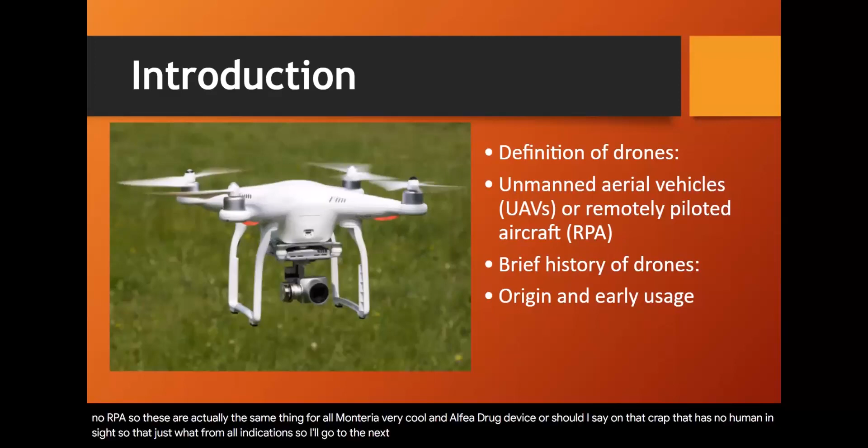So some people said yes for UAV and no for RPA. These are actually the same thing. UAV is unmanned aerial vehicle, and RPA is more like remotely piloted aircraft. A drone is just a typical aircraft that has no human inside. So let's go to the next slide to proceed.

In the next slide, we have what are drones? Drones are also known as unmanned aerial vehicle or remotely piloted aircraft. These aircraft can operate without a human pilot on board. They are controlled either remotely by human operators or autonomously with onboard computers. So you could have these drones being flown just by itself, or you could control them with your remote control.

But today we have what they call swarm drones, and this is where the technology has advanced to where you have multiple drones flying with very high precision and coordinated together to make a particular artwork.

The next thing is the concept of drones, where this concept actually started as far back as the 20th century, and for some reasons it's been used for a very long time. You can see it was emphasized that it was used in World War I and World War II. However...

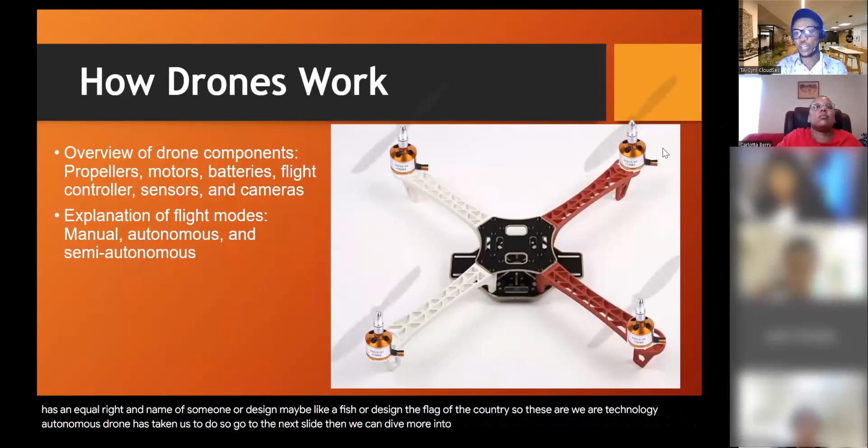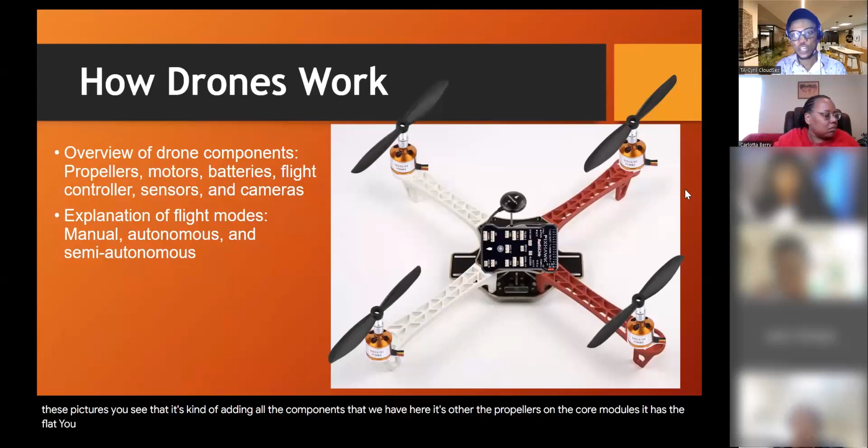So if you look at these pictures, it's adding all the components we have here: the propellers on the four motors, the flight controllers, and the GPS. When you click again, it's going to add the battery. Now you can see the battery underneath.

All right, more emphasis on how a drone works. Drones are equipped with multiple components, like I said earlier: propellers, motors, batteries, flight controllers, sensors, and cameras.

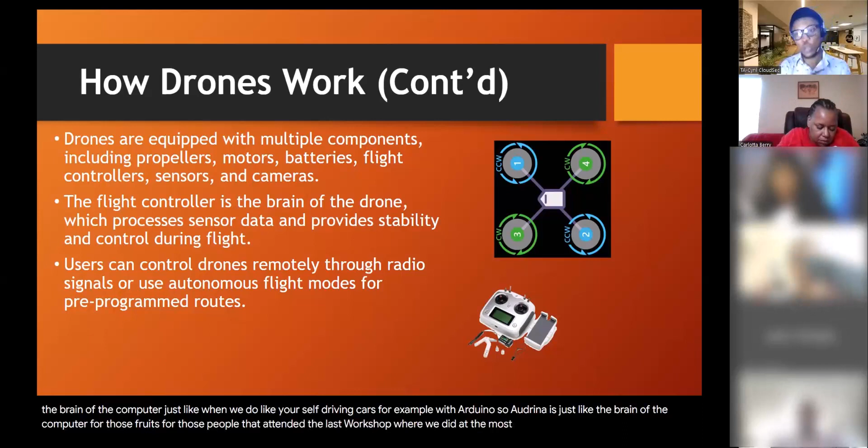The flight controller is more like the brain of the computer, just like with self-driving cars using Arduino. Arduino is the brain of the computer for those who attended the last workshop where we did the autonomous obstacle avoidance vehicle. But in this case, our Arduino in this technology is going to be our flight controller. So we have the KK2, the Pixhawk flight controller, and the ArduCopter, which is a flight controller for drones.

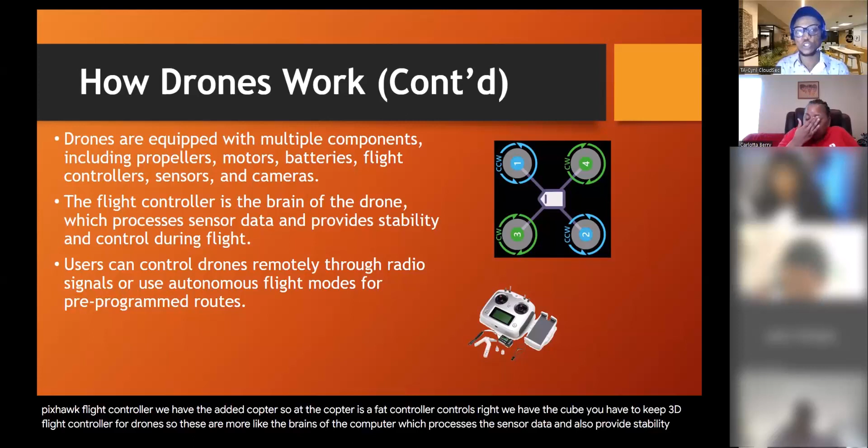We have the Cube, the Cube 3D flight controller for drones. These are more like the brains of the computer, which process the sensor data and also provide stability and control during flights. So users can control drones remotely through radio signal or, autonomously.

When I mean radio signal, what I mean is the control like this. I have this control, that's the joystick. You can actually use this radio, they call it radio, or you can call it remote control.

These radio signals can be used to fly this drone manually. However, you could actually still program your drones, more like a standard drone, not the one you have with you. You can program it with your computer and make them autonomous to fly with a pre-programmed route.

So when you see the picture we have here, you notice that we have four propellers, or four motors. When you look at it diagonally, you notice that two of the drones move counterclockwise, then the other two, 3 and 4, move clockwise. We'll explain this more in the next slide.

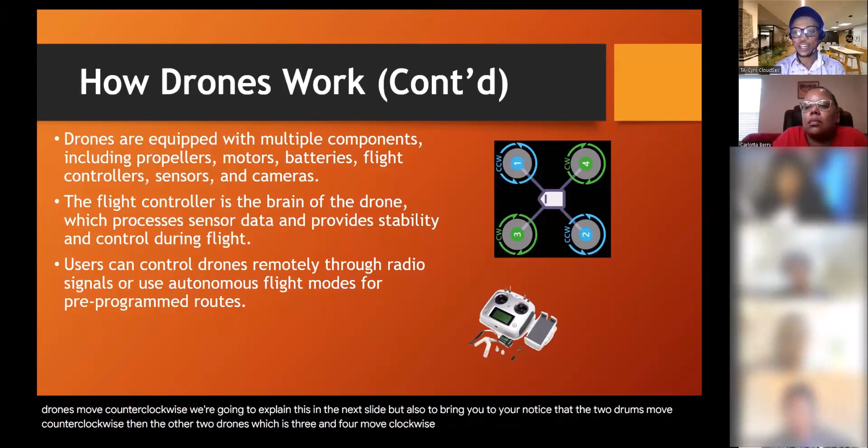Now, the reason this technology exists is just to make your drone balance while it flies, because it balances with these two directions, then balances with these two directions. So it doesn't make your drone turn around. It makes it stay steady and fly up and down.

Lastly, the picture we have there is just the remote control and the phone stand where you get to see your videos while you're flying your drones. That's just a picture of a typical drone remote controller.

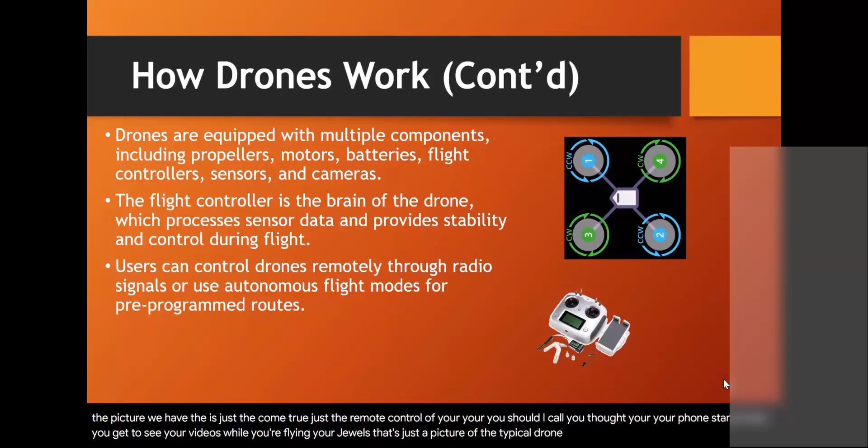I'm going to go to the next slide so we can proceed with the introduction of the DEERC D70 mini drone. This was a drone that was sent to us, and I think it's more like this one I have here.

This one has a 720p camera. These drones are toy drones, so don't really think you have a very, very big machine in front of you. I don't think you could expect much from these drones because they are quite cheap, unlike the more expensive drones. So these are quite cheap drones that you shouldn't expect so many big things from.

And it has a battery. I have my battery at the back here, so this is my battery. I don't know if you can see this, but let me see if you could see it. This is what my battery is.

Then one key start. You could actually press the button to start off, and you could fly in headless mode, which means you could fly irrespective of the position of the drone. So this is the front of my drone, for example.

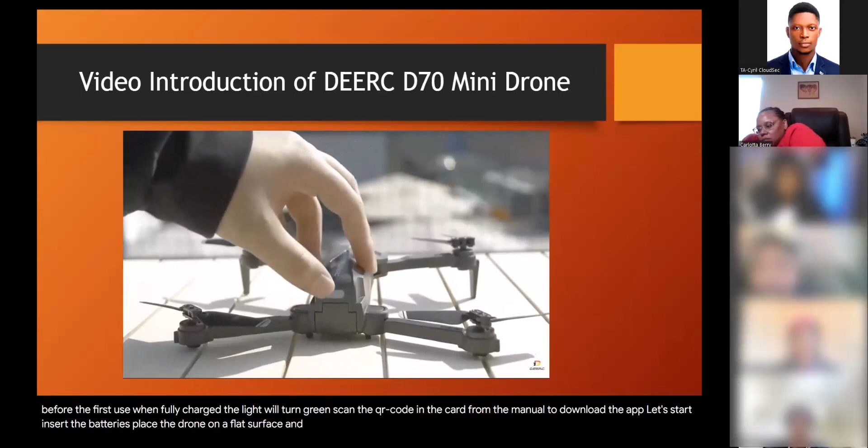Quick start. Insert the batteries. Place the drone on a flat surface and power it on. With the tail facing towards you, power on the remote control, and the drone will automatically pair with the transmitter. Connect to the Wi-Fi and open the app. Install the phone holder.

Unlock the drone. Short press to take off by pressing the right joystick once.

Push the joystick to make the drone flip in your desired direction. Short press to switch between the 3 speed modes.

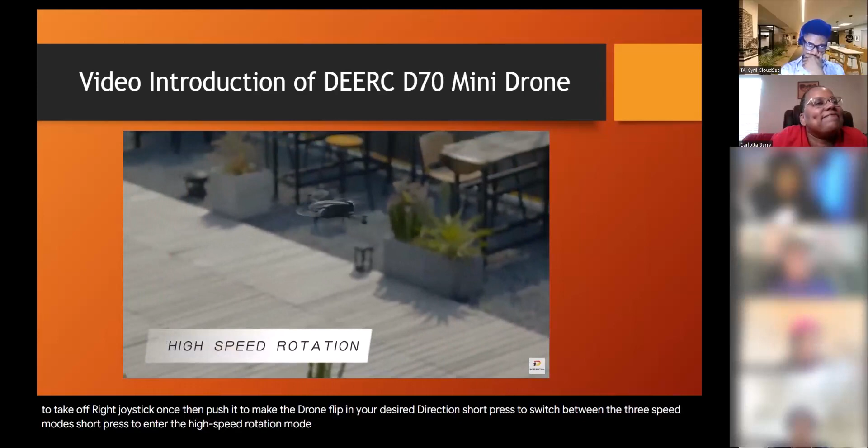Short press to enter the high-speed rotation mode. Long press to enter the circle fly mode.

Short press the left joystick to enter the headless mode, and the drone will fly forward in the direction of the head when you took off.

You can manually adjust the angle of the camera.

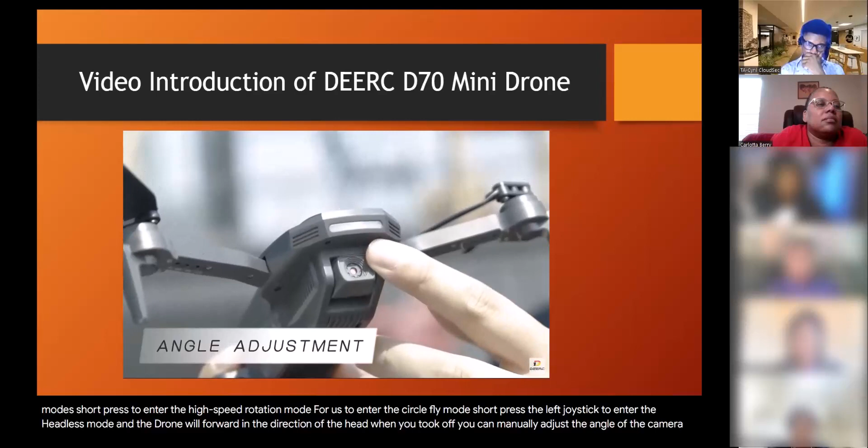Short press to take a photo. Long press to record a video, and press again to stop recording. You can hold the button in the upper left corner and push the right joystick in the opposite direction to adjust.

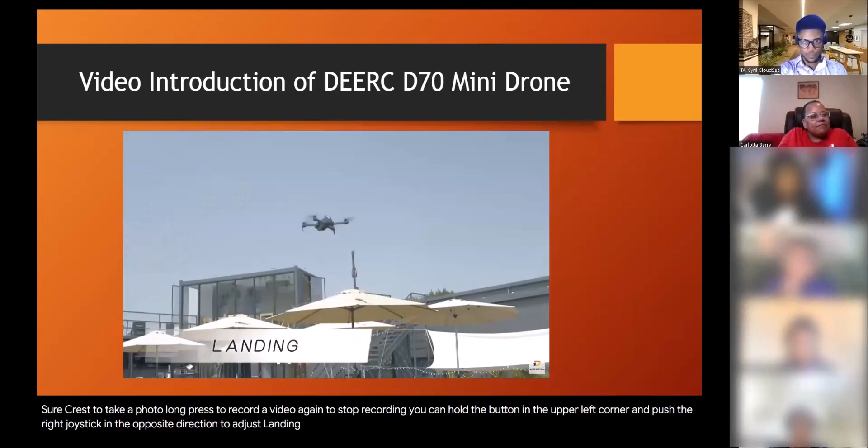Press both buttons above to emergency stop. Please use with caution in the surrounding environment. Controlling the drone without a transmitter.

You can view the tutorial, instructions, and album in the app. Enter the operation interface and call out the joystick to control it.

After activating the voice mode, you can control the drone's movements with specific voice commands like fly, right, and left. In tap fly mode, you can draw the flight trajectory and the drone will execute the command.

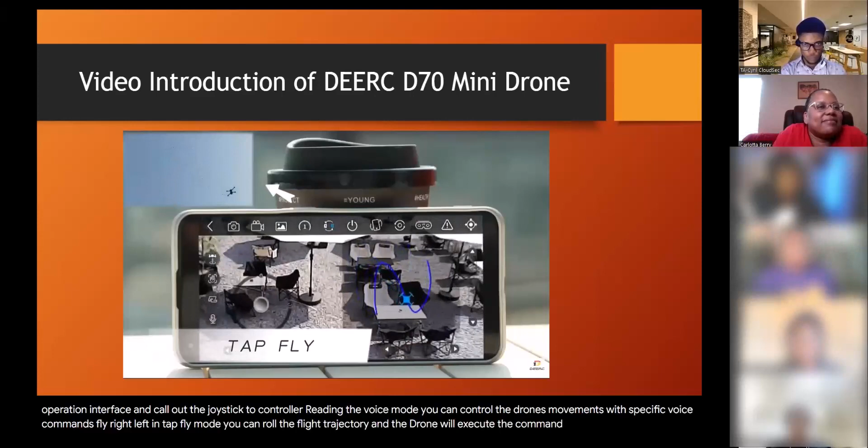Take a victory gesture to take a photo, and use a palm gesture to start recording, and again to stop.

You can also take photos and videos in the app.

Before turning on the gravity sensor, please hold the phone horizontally. The drone will fly according to the tilt of the phone.

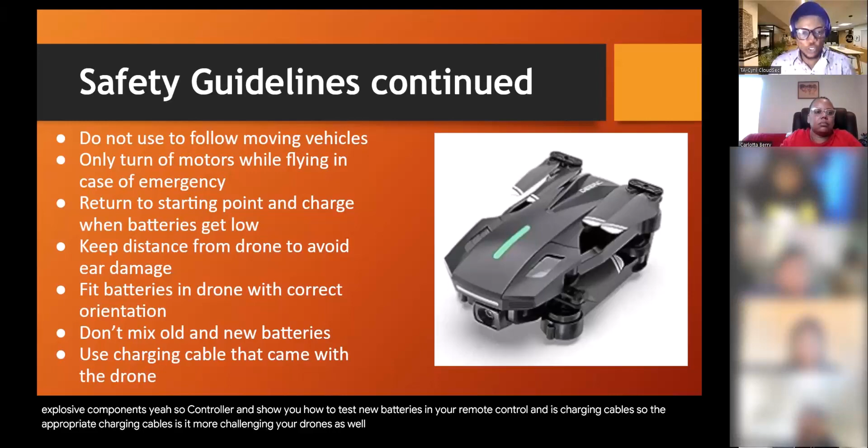So I'm going to proceed to the next slide. Let's see, okay, these are our maintenance checks. So you can see your drone is so light, so if you have dust particles on top of it, it kind of makes your drone heavy.

So these are some of the maintenance checks you should consider: avoid prolonged exposure to sunlight, because those LiPo batteries have a temperature range you should work with, unless they get very hot and could explode. Also, these drones are not waterproof, so you should consider preventing them from being damaged by water and such. Check for damaged parts and replace instead of using - very important.

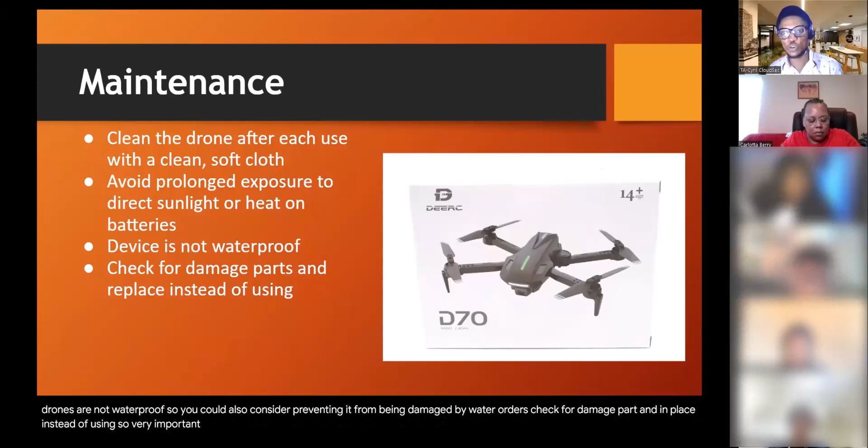Make sure you replace those parts. All right, so the next slide, let's see how much we've got.

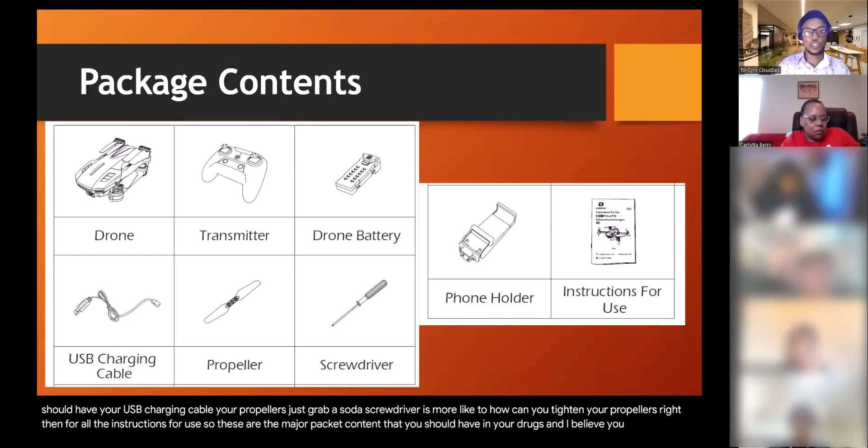So when you have your drone kit that was sent to you, you should notice that you have all these components available: your drones, your transmitter, your battery, your USB charging cable, your propellers, and your screwdriver. The screwdriver is more to help you tighten your propellers. Then a phone holder, and the instructions for use. So these are the major package contents you should have in your drone kit, and I believe you must have seen them. I'm going to go to the next slide so we don't take much time on this.

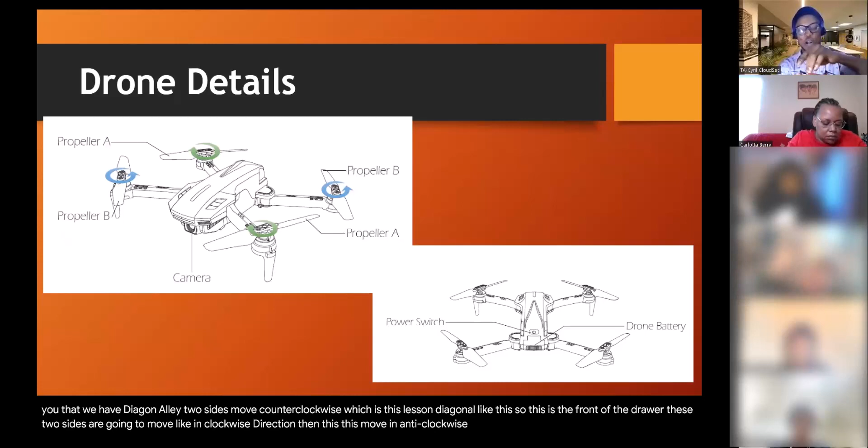So the drone details: like I said earlier, we have diagonally two sides that move counterclockwise, let's say diagonal like this. This is the front of the drone. These two sides move in a clockwise direction, then these move anti-clockwise or counterclockwise, depending on the English you want to use. So this is counterclockwise, while this is clockwise.

Why does it move like that? It moves like that because it doesn't want your drone to spin. It's balancing the speed here and the speed at this side, so your drone stays in one position. In physics, it's more like action and reaction are equal but opposite, so it's giving the action at this side and the reaction at the other side to be equal. So they're opposite, but it makes the drone stay in one position.

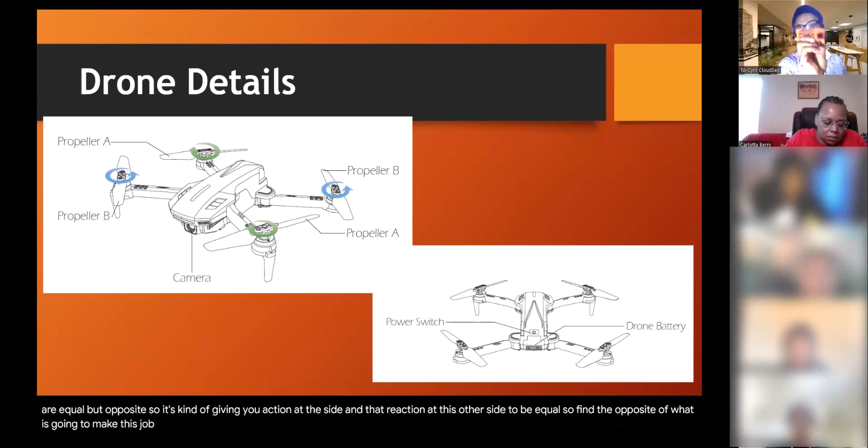This is more about the headless mode I mentioned. When you have your drone like this, you take off like this, maybe backward, then you fly your drone. So when you push forward, it's going to still fly just like that, right? It doesn't really get you confused about the orientation or position of your drone. But however, we still have the three major movements of your drone.

When your drone turns around like this, maybe like staring at people, they call it yaw motion. When it rotates around its one axis, it's called the yaw motion. Then when your drone moves like roll, this side to that side, it's called a roll motion, or rolling motion. Then when your drone moves forward like this and also backward like this, it's called a pitch motion. So in drone technology, we call this the 6 degrees of freedom.

When I was doing some project or training with some folks in the US, drone cadets, we used to sing this song. We call it: roll, roll, left and right, throttle up and down. Pitch goes forward, pitch goes backward, yaw turns all around. Roll, roll, left and right, throttle up and down. Pitch goes forward, pitch goes backward, and yaw turns all around. So that's just the song we use, it helps kids know they can add entertainment to their learning.

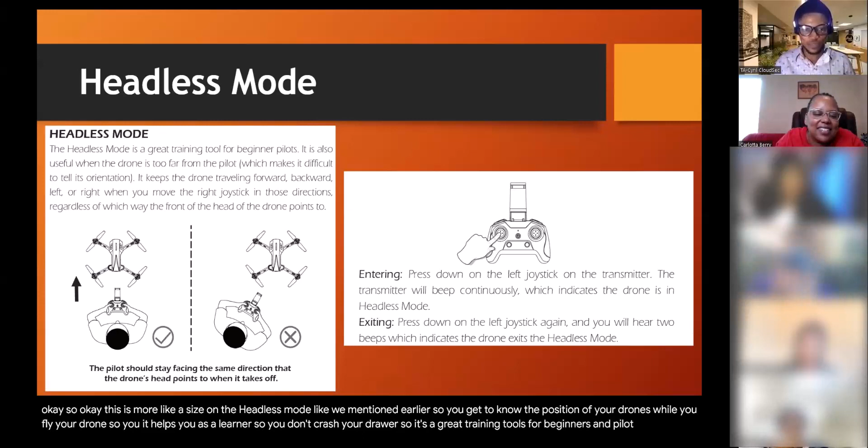This is emphasizing the headless mode we mentioned earlier, so you get to know the position of your drone when you fly it. It helps you as a learner so you don't crash your drone. It's a great training tool for beginners and pilots. It's also useful when the drone is too far from the pilot, and it helps you keep a good visual line of sight. Headless mode is very cool for you.

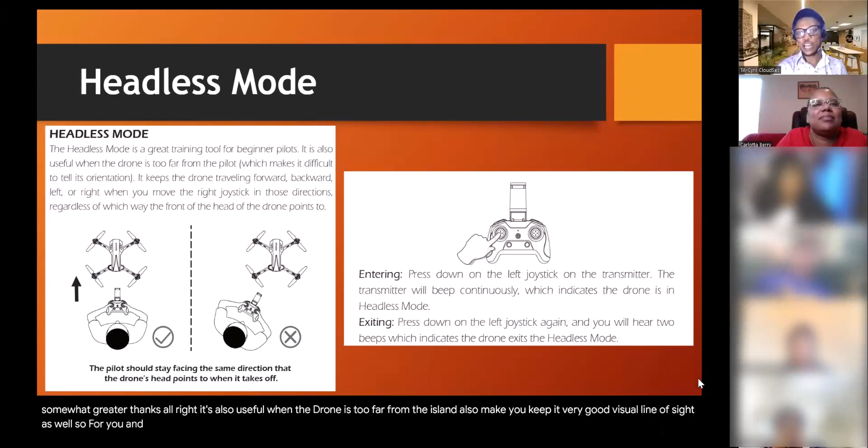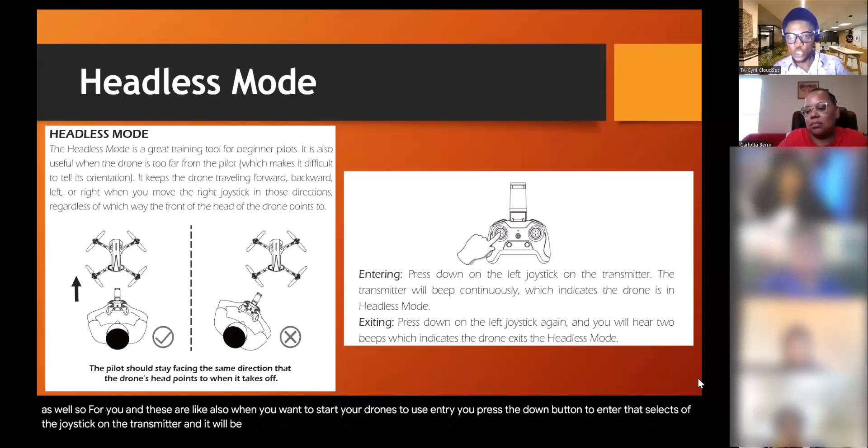When you want to start your drone, you press the down button to enter, that's on the left joystick of the transmitter, and it will beep continuously, indicating the drone is in headless mode. When you want to exit, you press down on the left again. So this is the remote control you already have, and this shows you how to start up headless mode and how to get back out of it. You also have the trimmer button and the high-speed rotation button.

I wouldn't advise you to use those high-speed rotation buttons because you need to calibrate your drone, you need to trim your drone before you do those. Otherwise your drone might fly differently. Also, don't carry out a 360 flip yet. Ensure your drone can actually stay balanced properly first.

They even made it quite easy. You could actually press a button and it takes off and lands, unlike flying, taking off and landing by yourself. So you have a takeoff button just by yourself.

Let's go to the next one, which is about arming your drones. I'm trying to manage with time, I think we have about 1 hour. For all arms of the drone, before you open them, ensure they get to the extreme position. If they don't get to the extreme, it affects your drone's flight, so ensure they get to the extreme — that gives it balance.

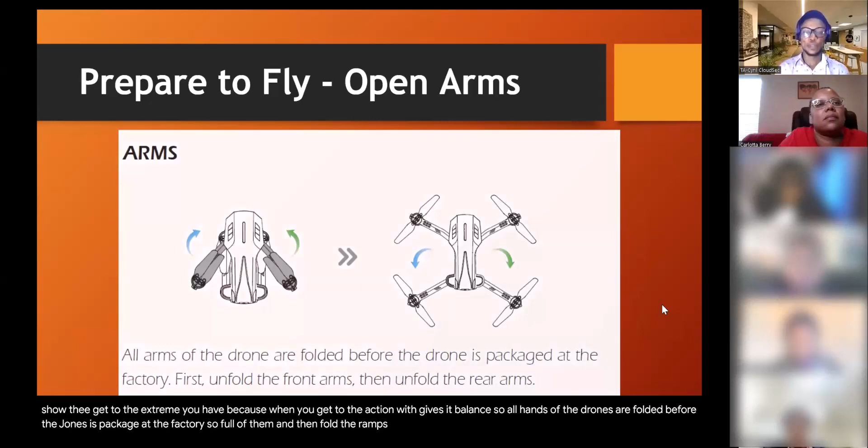Next slide — I think we have this slide twice. So, long press the power switch button to turn on the drone. I want to turn on my drone, for example. I'm going to press this — mine is in the middle, so I'm going to press it. You see it comes on, it's blinking at the moment. This is just my own drone here, more like a mini drone I fly indoors.

And it's on. So place the drone on a flat surface — ensure you place it on a flat surface, because the moment you calibrate your drone and the surface is not flat, it's going to affect your flights. Very, very important, so make sure your drone is on a flat surface.

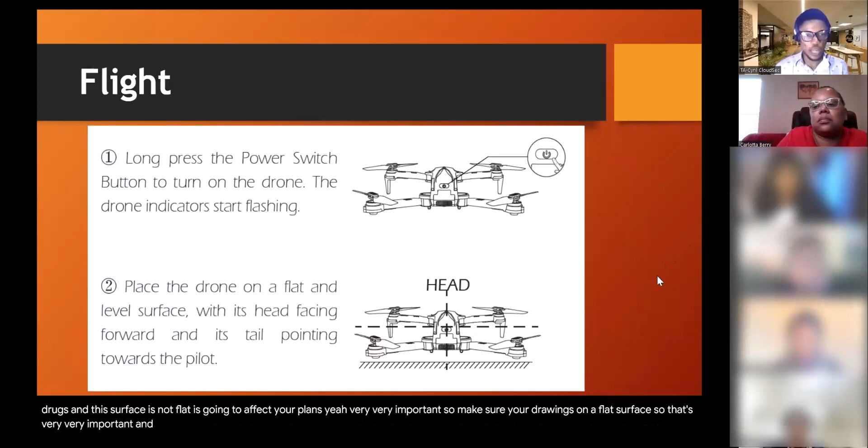Next slide — the head is going to face forward. If you make the head face forward, it's also very good for you. So whether you fly in headless mode or not, you know that you're facing forward, and it helps you coordinate your drone properly.

One key takeoff — your remote already has one key takeoff, so you don't need to bother about arming your drone. If I'm flying a standard drone, for example, what I need to do is arm my drone. Arming means you're just starting your drone's engines, so it's going to rotate by itself — the moment you arm your drone, all the blades rotate. Then the moment you press takeoff, it's going to take off, or the moment you increase it, it's just going to take off. So we have takeoff — short press — and when the drone is flying, short press and the drone will automatically land as well. So the button is for takeoff and land.

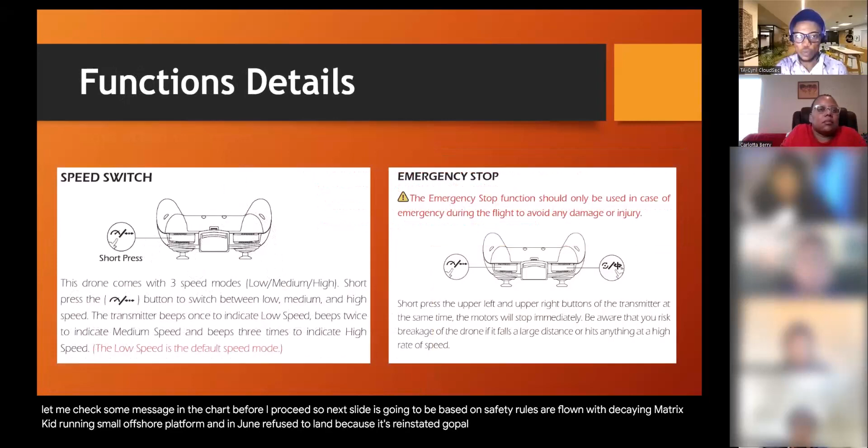Based on safety rules — I have flown this DJI Matrice 300, quite a big drone, on a small offshore platform, and the drone refused to land because it was detecting the pilot and co-pilot from the point he took off from. Eventually we had to force land and carefully move away from the propellers. Thanks, Christopher, for that insight — I really appreciate that as well.

So, Cyril, I skipped a couple of slides because the main thing we want to do is get the trimming working, get the GPS calibrated, and make sure everybody can take off and land in this next breakout. So I skipped to this slide. Okay, fine, that's fine, all right, we're doing this.

Shema asked if we're doing this now. We're going to do this now in the breakout room, but let's read up what we have.

Forward trim: if the drone tends to drift forward, you press the trim button and do not release it. At the same time, push the right joystick — push the right joystick back one time, then depending on how the drone drifts. So if the drone is drifting forward, you press the trim button and push the right joystick back once.

Make sure it's trimmed to get a more steady position. After each push, wait 2 seconds to watch the drone's movement. If it still drifts, push the joystick back again and repeat step 4 until the drone stops drifting forward.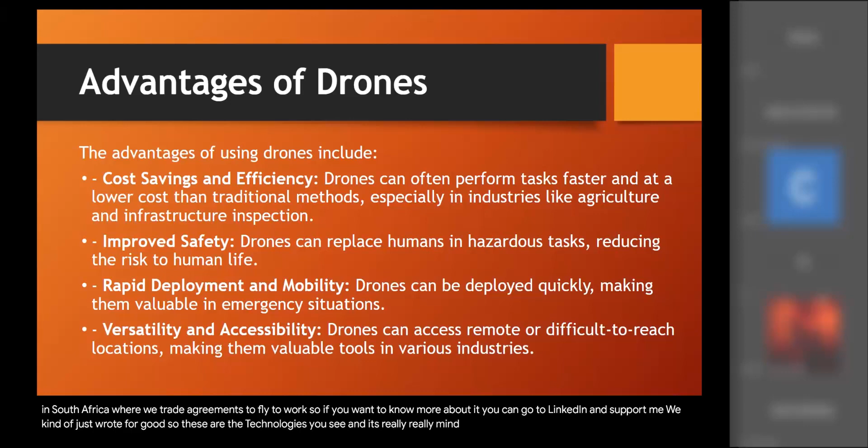So these are the technologies, and it's really mind-blowing. Let's go to the next slide and talk about the challenges. It has the importance, but there are so many challenges when it comes to drone technology - don't just assume we only have the benefits.

Number one is regulation and legal issues. Drone operations are subject to strict regulation - you must pass your FAA Part 107 and get a license to fly your big drones. If your drone is more than 250 grams in the US and you fly it without a Part 107 license, you could be prosecuted. So you really need to know these are very important to consider.

Privacy concerns - you don't fly your drones around your neighbor's yard. Due to privacy issues, you should ensure you're not spying on your neighbor, because you could actually be prosecuted for privacy reasons. Ensure you're not trespassing when it comes to drone flights.

Another challenge, which Chioma pointed out, is the risk involved. Drones are also aircraft - the fact that it doesn't have a human inside doesn't mean it's not an aircraft. If one collides with a typical helicopter, which is as big as 2 SUVs, you could get the helicopter grounded or damaged. The drone can get lost into the blade of the helicopter, causing something catastrophic - collision with aircraft, buildings, or humans is a real concern.

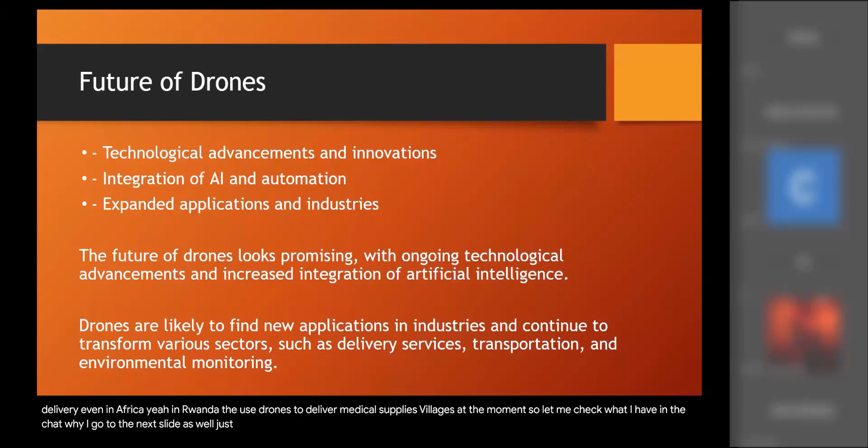Dr. Berry, can you go to the next slide while I answer these questions?

What kind of job can you get from mastering drone piloting? There are actually a lot of jobs - you don't necessarily need to be a pilot to go into the drone business. When I started as a STEM teacher in Lagos, for some reasons I started training people on drones, more like a drone trainer or instructor. The next thing I wanted to do was more like surveying - working as a drone surveyor or drone inspector, where you could hire me to inspect your real estate or construction sites for about an hour, then pay me my fee.

In some places, like the US, I know colleagues who carry out what they call network monitoring - they go to tall masts and check if there are any faulty drums on the mast. For those inspections, telecom companies can pay you a huge amount for just an hour of monitoring different masts to see if there are issues to fix. You report the data and videos to them, and they know what they want to do next.

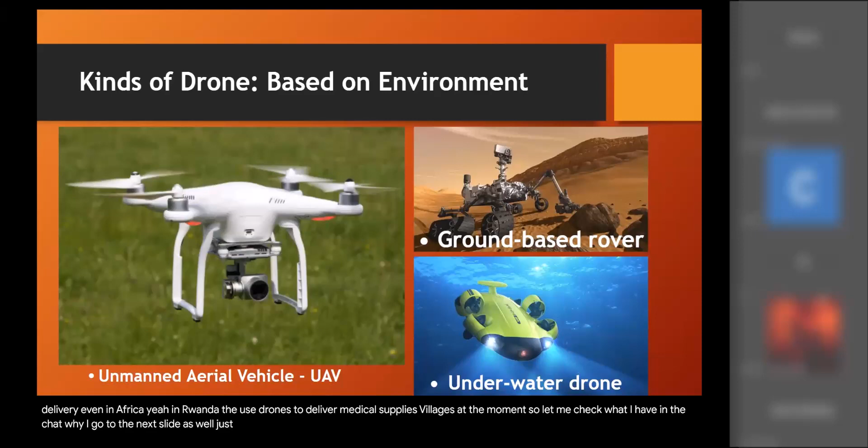All right, so the next slide - these are drones based on environments. Let's see if we have more classes of drones. Next slide please. So yes, these are other pictures or classifications of drones.

Here we have the vertical takeoff and landing drone. I've been talking about this drone. So who can tell me the class of this drone? Based on what we have here, these are the VTOL drones - vertical takeoff and landing drones. They don't really need a runway. What you just need is a landing pad, then you lift. So they don't need a runway for you to take off - that's why they're called VTOL, vertical takeoff and landing.

Then we have the horizontal takeoff and landing drone, and then the eVTOL. eVTOL is more like a combination of both - they have propellers and they also have wings. So eVTOL drones manage your fuel or battery better, because it saves energy. These are the drones used for delivery most times. But the horizontal takeoff and landing drones are more for military and weaponry use. You could also call the eVTOL the hybrid drone, because it has a mixture of propellers at the top and propellers at the back.

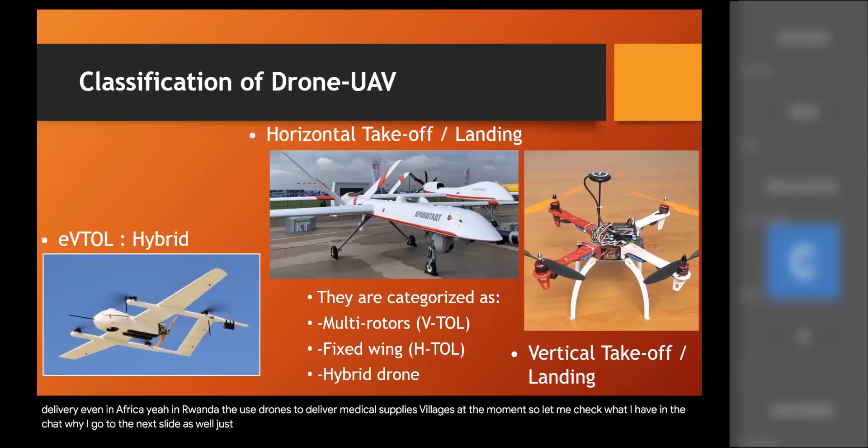So I'm just showing you - throttle up and down takes your drone up and down, to lift it, take off and land. Then yaw is to turn your drone around. Then we have pitch forward and pitch backward. Then we have roll to the left and roll to the right.

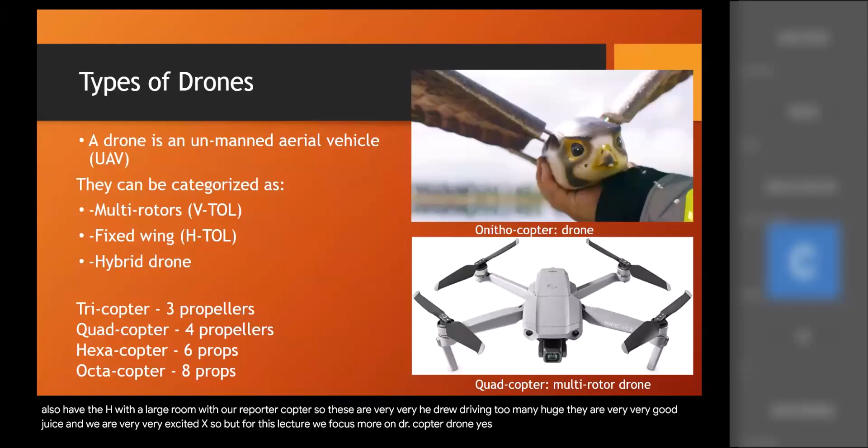I think it's more like the summary of what we want to do. We are actually still on time. Wow, I think we're on time though. Cool, so we managed our time properly.

So this image here is more like portraying some of the activities I've done. I volunteer with Black In Robotics and also with Brainstorm Alliance. There was a time I did a program for Black in Canada, the Black Canadian STEM programs, where we trained them all about aerospace and aerospace technology. These were the pictures I used to help them get the idea of how they could go into drone technology.

But the picture at the middle is showing a PIC trying to look towards a drone with the visual line of sight. It's kind of giving you that, for you to fly your drone, you should have a visual line of sight between yourself as the pilot and your drone as the object.

So in this place here, you see the PIC is looking towards the drone. It's focused towards the drone. Now, you don't need to look sideways. You just have to look towards your drone. And that's the major thing you should do.

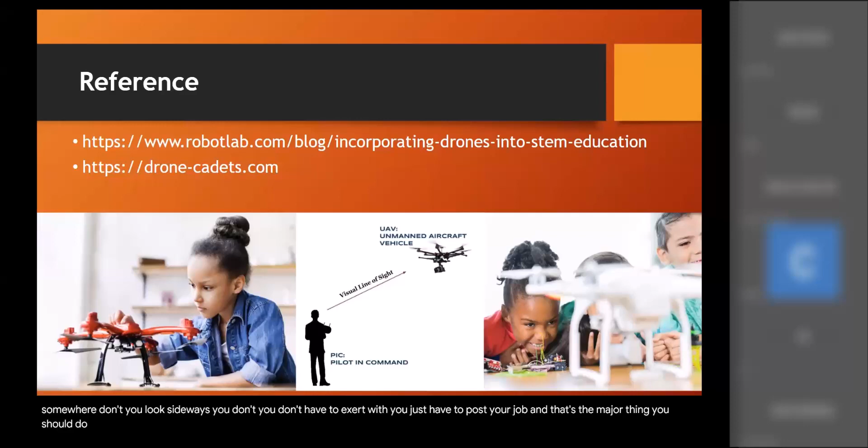All right, let's see what we have in the next slide. Think we are moving with good speed. Okay, so these are just more like the control.